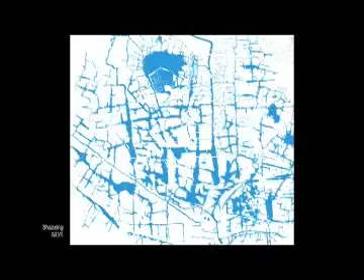When Dayu came into taming the water, it seems to me — and I'm really from North Louisiana, kind of country in some perspectives — they just dug a lot. If you take enough shovels and enough Chinese people digging, you can find a way that the water doesn't go onto the land anymore, because you've created a lot of space for it.

If you think about the plan of New Orleans, you'd see very little water. Look at the map of Jefferson Parish or New Orleans East and New Orleans in the middle, you'll see there's less surface water in New Orleans, excluding the river, than in Jefferson Parish or New Orleans East, which is an anomaly. It means the water has nowhere to go except in our streets where we store it, or in our cars or houses. So Shaoxing, a more recent but couple thousand-year-old water city in China, but European models moving closer to Holland.

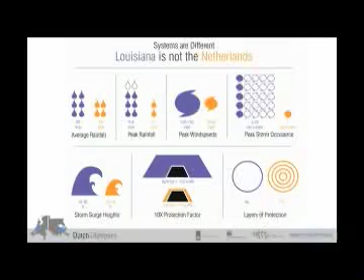If you look at that storm surge, if you look at the levee, what it takes to get us to a times 10, if you look at the peak rainfall, the peak rainfall we have is far higher than their peak rainfall. The 60 inches, 40 inches is not a big issue. The big issue is that deluge.

So we also have other problems, and this eroding coastline is the first problem. So Dutch Dialogues was not set up to solve the coastal problem. The coastal problem is essential. We can't live with this situation.

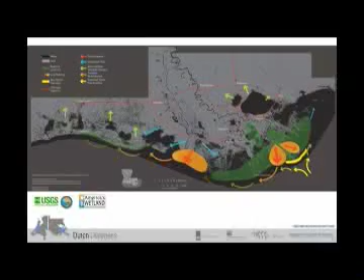We can't have that future. We have ideas about how to alter that. They're good coastal scientists, and that part of the discussion is integral. These are not separable layers.

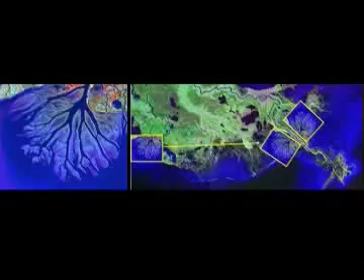And there is hope if we can control the river. But as I realized right after the storm, our issue in South Louisiana is a continental level problem. The drainage basin encompasses the whole continent, and we in Louisiana can't fix the whole thing. We have to advocate, and we have to become much more passionate and persuasive about our need.

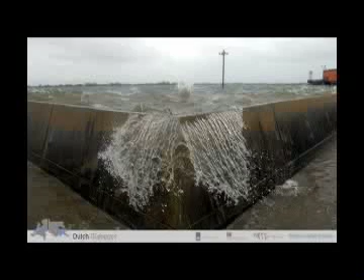The second level of protection is the levee protection system. Dutch Dialogues was not intended to address the levee situation. This Gustav image is a frightening image. It's not a comfortable image.

That's the industrial canal. This is outside the industrial canal, the MRGO closure that's being built. Whether ecologically it's the right approach or not, I don't know—nobody from the Corps is here. It does provide significant storm protection. So that in fact is the closure structure at the MRGO.

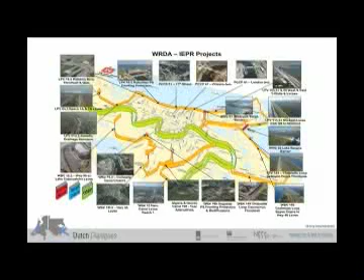Within that situation, within those barriers, those lines of defense, coastal, then levee protection, we started looking at internal stormwater management, figuring that the one thing the city of New Orleans and all its planning processes could really do something about was urban planning, urban design, and water.

This is an image taken by Rami in my office, right at his house recently. It's not just hurricanes that cause us problems. This is not the way the first world is supposed to live, but we live like this because we pipe and pump.

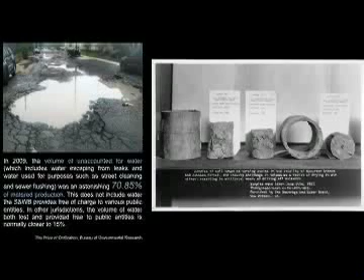I want to point out with this slide that this is an older problem and a bigger problem. If you look on the left, that was the report just issued by the Bureau of Governmental Research about the Sewerage and Water Board. You see that 70% number? That's the amount of treated water that is not being charged, meaning we're losing it.

But what worries you there is the lack of feedback. If you're an intelligent person, you have to learn that if I drink four whiskeys at night, I'm going to feel bad the next day.

If I pump all the water out of my soil, and that on the right shows you that in 1927 they understood the soils were shrinking when pumped dry. If they knew that in 1927, and in the 1930s they knew the ambient temperature of New Orleans went up when they pumped it dry, why don't we adapt? Why do we continue a regime that doesn't work? Well, mosquitoes. Anyway, there are other ways.

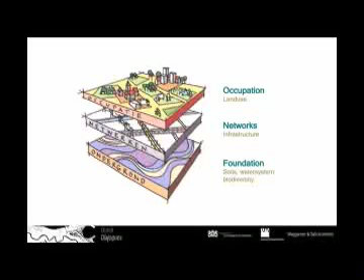This is the Dutch process of thinking. It's fundamental, basically the book in Europe now: you start planning from the foundational level, from the underground—soils, water system—and that other important word, biodiversity, because that also addresses mosquitoes. Then you get into the networks and infrastructure, and then to where we live, the occupation level.

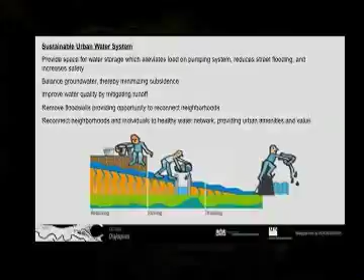So a sustainable water system looks different from ours, because it stores a lot of water where it falls, and only drains it when needed. What we want to do is keep it where it falls—that also saves energy, which is part of the big complex, isn't it?

So Dutch Dialogues 1 and 2, quickly: in Dutch Dialogues 1 we really only had an exchange of information. This was a comparative map done, I think, by DHV, and Piet Dircke from Arcadis showed it. This shows that in fact the deltas are similar in size between the Netherlands and ours.

Then there was a comparison of rules and regulations, and we operate in different conditions. They do not have flood insurance in the Netherlands—that's a higher degree of confidence than we have. They've got 10,000-year protection; we've got maybe 100. It's not a very good investment model.

So then in Dutch Dialogue 2, we looked at three scales. Transitioning to Derek, who participated in both Dutch Dialogue 2 and 3, we look now at safety first. We looked at the multiple lines of defense. We're looking at urban, right, number five.

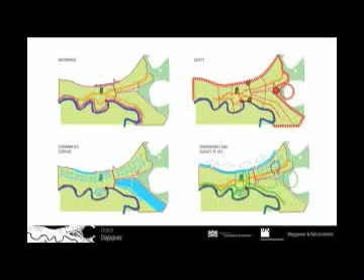But you've got to consider what happens on the outside to protect the inside. And then you have these backbones: safety levels, stormwater, storage—that's interesting, store water. But it's all for quality of life, because you're not building it to have a beautiful machine, you're building it so people can live in it.

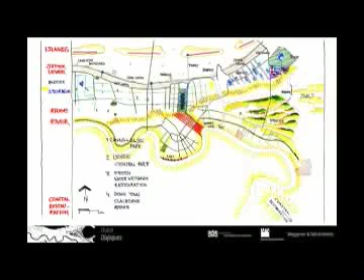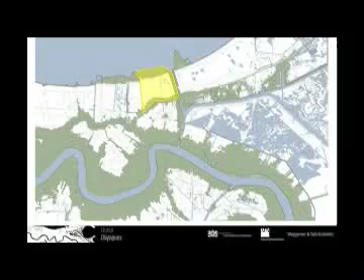If you look at this left-handed drawing, you can see the line that goes through this Gentilly Ridge. You can see the idea of islands, which is supplemental protection of the lake, maybe, maybe not. Claiborne Avenue was identified by us, yes, but also permeated by the Dutch, as a key component for reconstructing New Orleans. I don't have to talk about that in this room, but follow—it's an interesting discourse that will go on.

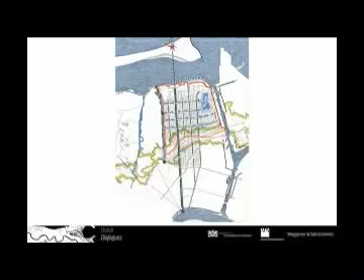We looked at a plan for Gentilly that would introduce water. You see the island lurking out there because the Dutch love islands—they go on vacation somewhere every year, many islands. Elysian Fields: when you're doing water-based planning, you're also looking for long lines and connections, and with UNO there, it's a very important street.

This rendering seemed to get a lot of attention, even though we were saying, no, no, we want to look inside the levees. But everybody wants to talk about the island outside the levees.

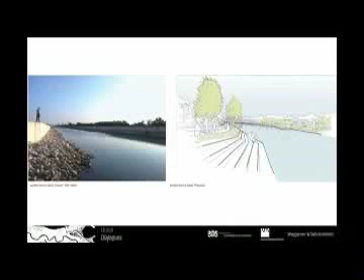This was a drawing, and it'll come back in the second part right after I finish here and turn this to Derek, about the outfall canals, which are a shameful waste of opportunity. You see what we have and what we might have. At that point, we thought.

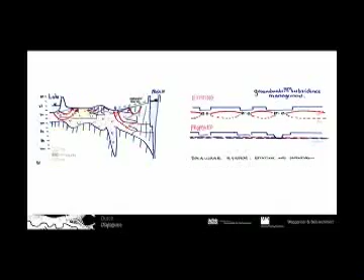And lastly, we looked at the smaller scale, which was the Hoffman Triangle area, a low-lying part of the city. And if you look at that cross-section, north-south, with the lake on the left and the river on the right, the river is very deep. It's a trick question to visitors—some of you may not know it's 60 meters deep or more at the French Quarter, which has incredible groundwater pressure.

And then you get this drawing on the right made by this groundwater expert about balancing groundwater, which is another key if you want your infrastructure investments to last. Groundwater balance is fundamental. Soils are fundamental. If we don't deal with these things, we're basically building our house upon worse than sand.

So we take these areas of urban blight. This is Felicity Street. And we say, well, what could you do? And maybe you could create a water system. This actually started at the river, but there's just this drawing at the end.

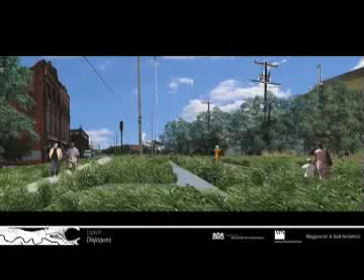And then you could have this area that had water somewhere out there instead, and probably has higher real estate value, with or without the electrical poles. And then when it rains hard, you have a place the water goes so it doesn't just stand in the street, and you can actually run.

So if you go back to Dayu, you're trying to get space for water and you're trying to get it below your feet. It's not that complex. But now I'll turn it to my good friend Derek and let him talk about Gutter to Gulf, and I'd like him to explain that title, if he will, since he's an architect too.

Thanks, David. Let me see if I can pull this one up.

So, hi, Gutter to Gulf. It's kind of hard to follow David because his presentation seemed to get stronger and stronger, and the message stronger and stronger as we go.

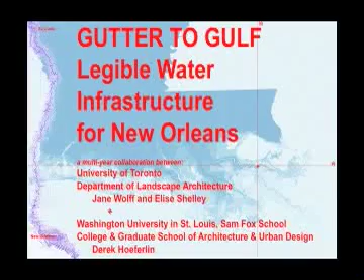A couple of years ago, a colleague of mine, Jane Wolff, who taught with me at Washington University in St. Louis and now is director of the Landscape Architecture Department at University of Toronto—we had been working down here in different ways with community groups, through the Unified New Orleans Plan, or with David, for a number of years, and we thought, how could we start to help parallel, and have students and academia enter into this conversation?

And I know it's probably kind of difficult for me in this kind of venue to come to the table with student work in terms of how it gets perceived or received. But I think the importance is to see how it becomes a message and an advocacy effort, and less of pie-in-the-sky ideas.

So to back up a little bit, I've taught at WashU, I used to live in New Orleans, and I've taught 5 studios now, the last 2 being Gutter to Gulf. First, the idea of Gutter to Gulf is about working at different scales, from the gutter of the house to the Gulf of Mexico.

But the previous 3 studios, I was working with many different community groups within the city at different scales. So the title here, 'the extraordinary, the everyday, and Gutter to Gulf's pursuit of exposure,' really gets to the root of what we're after.

So many of these issues we talk about—water management, what does it mean—it's so hard to uncover because it's rarely seen. But our work is not necessarily about the extraordinary, the hurricane, the worst-case scenario, as David was talking about, which deals with the much more regional and perimeter issues. Again, it's the everyday.

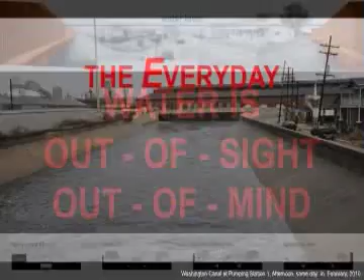And then later in the afternoon, this was it filled up after heavy rain. So again, we get this—most people in the audience understand that water is out of sight and out of mind. Everything's been buried below the street, and the water levels in much of the city are above the eave lines, the gutters of the house.

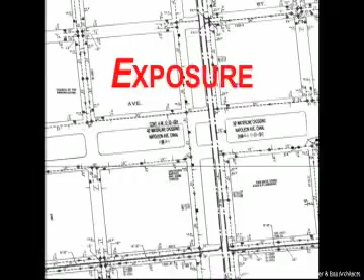So again, to this idea of exposure, what we've had students try to uncover is how do you work with accurate base information. This isn't just pie-in-the-sky efforts where we're speculating on what this street does, what this neighborhood does in terms of water. We're trying to work with accurate information as best we can.

So these are some of the Sewerage and Water Board maps, courtesy of working with Waggonner and Ball and other sources. And we have a website, guttertogulf.com, that shows last year's work, the first year's worth of work.

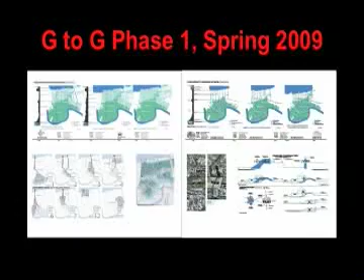The work itself is heavily based in research. So it's not a traditional architecture studio. It's architecture and urban design, but it's also questioning what architecture's role, or architecture students' role, is in dealing with issues of water management, and how design plays a part of that as opposed to just engineering.

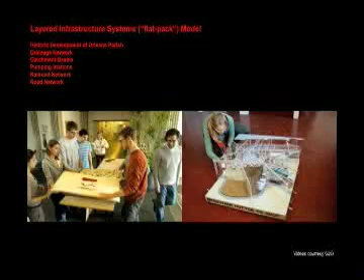So in the first phase, we were working as best we could with the base information. A lot of it was inaccurate, a lot of it was hard to find. It was a struggle for the students, but it's always good for students to struggle. We started to build a series of models and do a series of drawings with the information, trying to expose the infrastructure systems of the city.

So this is a kind of crazy model we built and brought down to leave with David and the Dutch Dialogues effort—a model of New Orleans. It's not your typical model that just shows the streets and houses, but actually shows all the layers of major infrastructure: the major highways, the pumping stations, the underground drainage, the rail lines, the street network, and how those systems start to work together.

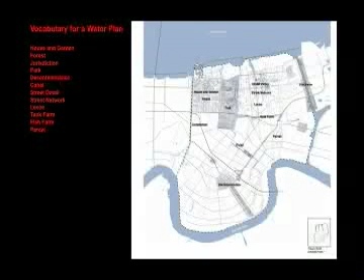Throughout the semester—a 16-week semester, spring of '09—the students came back after our field trip to New Orleans and came up with a vocabulary for a water plan. This is not a traditional master plan in any sense. It's just different words that deal with water and how they can operate across the city at different scales.

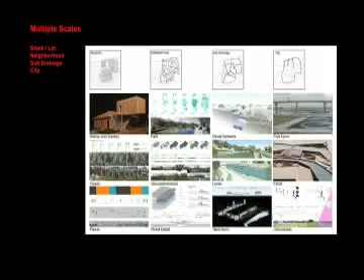So instead of just looking at the scale of the block or the lot, traditional architecture, students were also looking at what it means for water to operate at the scale of the neighborhood, the scale of the sub-drainage unit—which would be more or less the scale of the planning districts of New Orleans—and of course the scale of the city, larger scale interventions within the city.

So that was the first year. The second year, this past spring, we were able, again with David's help and others, to start working with more accurate base information. We started off the semester with something that's ongoing as a question, and I think for people in the audience to think about as well.

We had a threefold charge, and the first one was for the students to simply analyze the planning district and jurisdictional boundaries of the city and how they relate to the drainage units of the city, Drainage Basin 1 in particular.

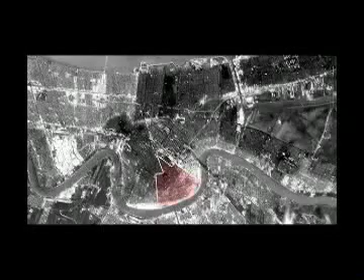So this is a typical map of the flooding after Hurricane Katrina, just highlighting one of the planning districts, Planning District 2, that I worked a lot in back in the Unified New Orleans Plan days. I was the district manager for this district.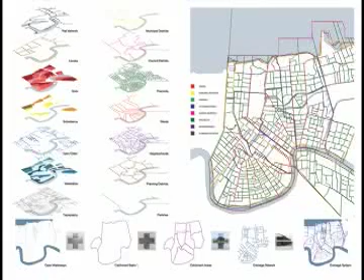And what we started to do was then see how the physical structure of the city—on the left-hand side, the rail network, the levees, the soils, the open water, what you can see—overlaps with the policy aspects of the city, the invisible boundaries. And they don't, pretty much.

On the right, you can see these purplish and green zones. That's where these different political boundaries misalign or align with the sub-drainage units, which are what the pumping stations are based on in the city.

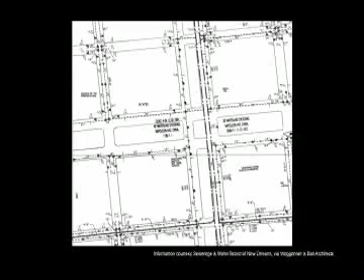The second aspect was to more accurately understand and expose the current hydrological systems. Back to this base map, this was a drawing one of my students had done about rethinking what you can do with the neutral grounds in the Gentilly neighborhood, Prentiss Avenue, I think—how you can start to expose it and make it a public amenity with bike paths, et cetera.

Then this past spring, my students with better information were able to correct it, to realize that what Andy, who now works for David, was drawing was interesting, but there were certain issues because we didn't know what the culvert sizes were, et cetera. This is a long-term, ongoing learning process we're going through.

The third main aspect was to generate classification systems of the drainage within the city. The students and faculty worked to develop taxonomies for the historic remnants, navigation routes of the city, open canals, and underground canal system.

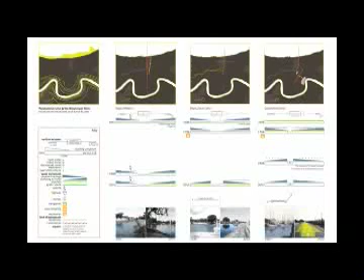For the historic remnants, we did a series of drawings to show the development of the city over time, and a coding of how the different canals and drainage pathways were altered and got out of whack with the issues of subsidence and development throughout the 20th century, along with real simple cross-sections showing what they used to look like and what they look like now.

The navigation routes start to take a step back and understand Drainage Basin 1 in Orleans Parish within the larger structure of the region, and then construct informational drawings that show how aspects like the riverfront along the Mississippi have developed over time and become harder edges.

Open canals are simple drawings that show the different types of canals you can see, such as Washington Canal or London Avenue Canal, and how they relate to the larger drainage network of the city. These are again trying, with the best we can, to use base information and numbers to back it up.

Finally, the underground canals, where we're showing how the water moves throughout the city in these different sub-drainage units in Drainage Basin 1, and the capacities that operate with them, along with a series of drawings that show all the different culverts—single box, double box, etc.

These drawings start to talk about how water moves through neighborhoods and how it gets to these pipes and then eventually out to the lake.

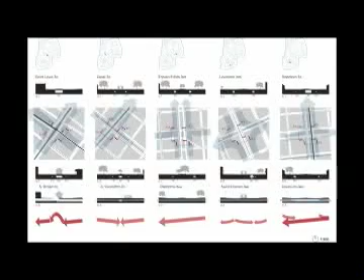In the bottom left, you can see these red lines that show on a dry day where the water goes, and out from, let's say, the Mississippi River's edge along the Garden District, the journey of the water will eventually make it out to Bayou Bienvenue. As opposed to during wet times, it switches its route and goes out to Lake Pontchartrain.

So we're really trying to uncover what this underlying system is and then how you engage with it and supplement it.

So kind of four parts to our work: research, speculate, disseminate, and collaborate to make it within our sites, within our minds. What does it mean for the future of New Orleans?

It's not necessarily these really wacky ideas of how we can live with water in the city, but trying to seek out more publicly visible ways to showcase the student work.

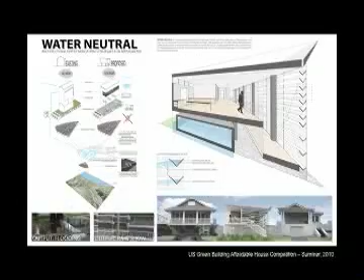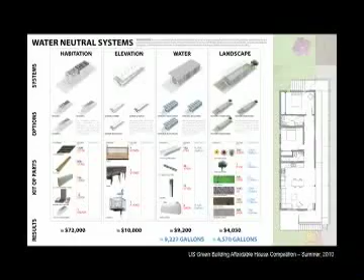This was a competition that a couple of students entered in the Broadmoor neighborhood about speculating on affordable housing, taking on the house prototype and using water as the main design component of the house, so you could create a water-neutral house and site that wouldn't burden the existing drainage system within the neighborhood. It didn't win the competition, unfortunately, but it was a strong project.

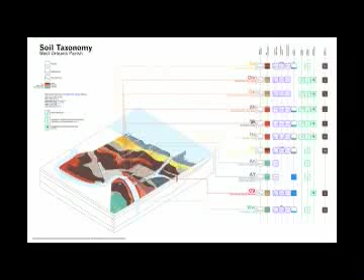This is another project at a bigger scale where a student was doing a soil taxonomy, specifically looking at the Elysian Fields corridor.

David alluded to earlier in the Dutch Dialogues, the Gentilly project that was looking at Elysian Fields connecting the river to the lake, and the soils that exist throughout that transect, or throughout that main boulevard, change along the way.

So it basically tells you that if you start to look at what type of tree plantings, tree types, soils, and grasses you use within that corridor to help mitigate the storm water, it changes.

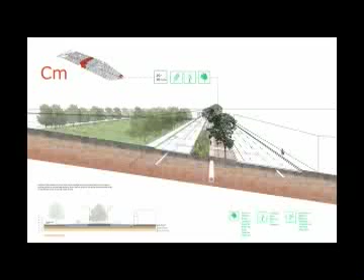So instead of Elysian Fields being perceived—albeit gorgeous as it is with its live oak canopy and green all the way through—he was starting to question how people can inhabit that space in a varied manner, and then help, from neighborhood to neighborhood, mitigate the water storage system or the water system.

And then finally, I'll end on an ongoing project that isn't public yet—it's called NOLA is Water, part of Gutter to Gulf. The website will say it's in production while we're making sure everything's tight.

It's going to be an educational, informational site for anyone to use. We've put together a whole series of words that deal with water within the city. You can click on these words—for instance, wetland—and get bold statements that everyone in the audience probably knows by now, and maybe more Americans know since our president said it.

Then you go into it, and it's highly interactive. I'll show the beta test now—you can move your mouse throughout these areas of the city and see how the different drainage units work.

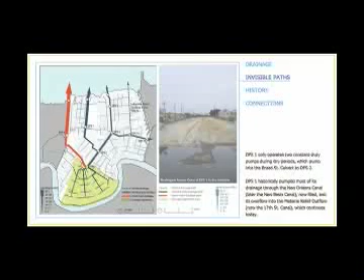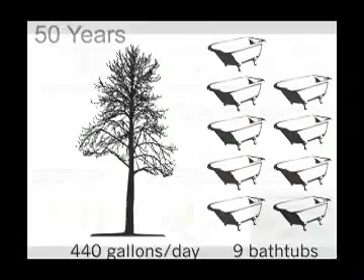There are also infographics, like showing that a mature cypress tree can uptake 440 gallons of water a day, which is 9 bathtubs. That's pretty impressive. But we, I guess, continue to plant palm trees.

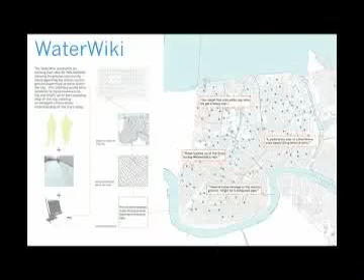NOLA is Water—we're going to continue it further to raise more awareness, or maybe turn it into a wiki-based website. These aren't developed yet, but we'd like to move forward with it, where someone could go in and report, say, a pothole forming right in front of their eyes. There are big challenges with how you control and disseminate this information, but I think the legibility is important.

And then finally, I'm starting to take Gutter to Gulf and try, just like with David's work and the Dutch Dialogues work, to go global. We can really start asking questions—it's important to compare deltas, urbanisms, and watersheds around the world, but we have to be careful why we're comparing them, since issues of politics and socioeconomics are involved. So we're going to have the students and myself look at a bigger scale.

I was always troubled by the fact that, as a kid, you got a globe, and New Orleans is at 30, and you go around, and Cairo's at 30, and our river flows this way, and theirs flows this way. I didn't realize that opposite us in the northern hemisphere is Tibet. So why are we so low and they're so high—couldn't we split the middle somewhere? I don't know.

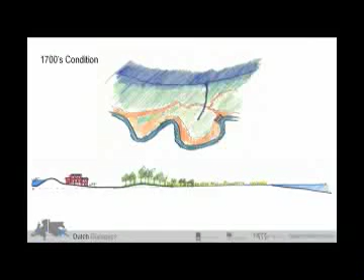If you trace our condition back, a key point is that New Orleans was at or above sea level in 1700 when it was settled. That's the green area. But if you look at the section below, the lake is on the right, and out to that silver line was the horizon—a back swamp, but basically land at sea level or just above. As time went on, we got to this condition where some parts of the city are 8 feet or more below sea level, because we drained it, tried to dry it out so we could live there.

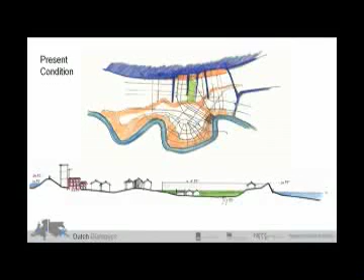And you see that line going across the bottom, from the top of the levee—the flood wall that those girls were trying to look over. How'd they get up there? I don't know that.

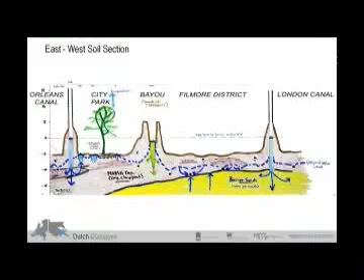This is an east-west section. The same hand that drew the north-south section drew this one. What you see is an exaggerated perspective again, and you see how absurd that really is with those stem walls, those highway walls on top of those outfall canals, with the bayou in the middle, and that dotted line is sea level. So you see this besides, and you're remembering the soils.

The existing outfall canal system is, in a way, the current Battle of New Orleans. I don't know the right victory to search for, but this asks that question. That's the Orleans Avenue Canal on the left, London on the right, and the pumping station back inside. That was the fairgrounds, the racetrack, where we have the jazz festival in the middle.

So if you actually get to look inside there, this is what you see. Maybe they don't want to have to maintain it, so they keep the walls out so they don't have to cut the grass, so to speak. But you can't maintain that. The point is that if you go there and you scour that, you undermine the wall. So we have, ultimately, a failing situation. There are 15 and a half miles of those walls in the city of New Orleans.

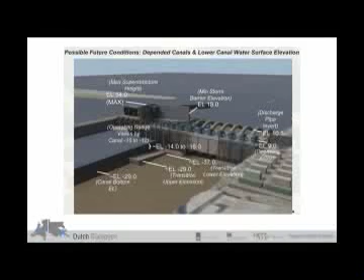Option one, this lingo, those of us who live in New Orleans—and I apologize for the New Orleans-centric perspective, it's not my sole capability—but in that thing, option one, the Corps of Engineers, is to leave those walls there and basically close it off, and you're going to have to reinforce those walls, and live with them ad infinitum.

So option two, or another thing, becomes possible once you put these permanent closure structures at the outside. The permanent closure structures are in process of a design build. Very complicated drawing—I've looked at it many times and it confuses me still.

But you see the pump station needs to be 54 feet above sea level. You've got to get the water out at about 10 and a half feet below sea level. But the number that's troublesome is either minus 17 or minus 29. That water is going to be 29 feet below sea level there. The ground's 8 feet below sea level. There's no real benefit even if you take the walls down, because now you've got to put a wall up to keep it from falling in because it's so deep.

So that's what option two would look like. You could actually take the walls down and the water level's way down, but then you've got the freeboard so that you can get rid of the canals and it'll drain by gravity.

So this is what officially we in New Orleans want. The Sewerage and Water Board wants it, the City of New Orleans wants it, Jefferson Parish wants it, the State of Louisiana probably wants it. But we asked—because nobody pays us to do this stuff, right? So we can say what we want. We asked, is there another way?

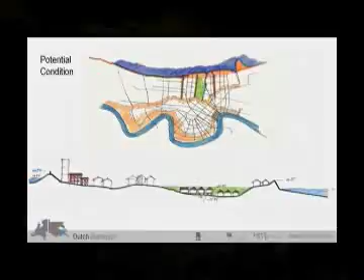So the idea that was put forward in Dutch Dialogue 3 was, and this is the large-scale issue, Karen, the bigger scale thinking that sometimes you want to engage in: okay, you take down those walls and you get this area here where you can work with the top of the levee at about +5. And you deepen it some, but you keep pumps in place so you create an operating system.

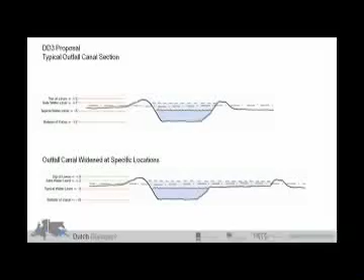And you also look for opportunities to widen the canal to increase the storage capacity, because it's all about storage capacity. Water doesn't dissipate, unless it's Noah's time, 40 days and 40 nights. You can get rid of it, but you have a place to hold it.

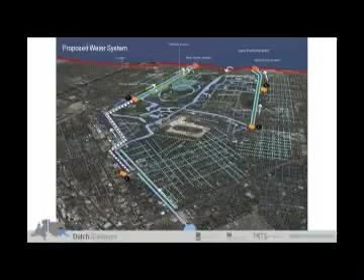So what we proposed in this, and this is quick, three days' work, was to create a circulating water system that in fact uses Bayou St. John as the source of water into the city. If the lake's at +1, the bayou's about minus half a foot, minus 0.6—I won't get too technical—but you'd set the water level in these canals at -5, and what you've got then is a system where water moves all the time. And now we don't worry about mosquitoes, it's slightly brackish.

So anyway, without going into more detail, that is the big idea of Dutch Dialogue 3. It's also, because I'm a moderate, I suppose, an intermediate cost component to option 1 or option 2. But it is where all the benefits are. Why make investment if there's no benefit in it?

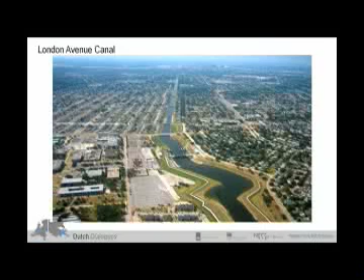So what we get is the London Avenue Canal becoming a green sward with water in it. So instead of this, which we have now, you get this. And you get this opportunity to create this space alongside. I would dare say that the real estate value would grow higher, and that abandoned little brown house would become something else over time, because now I'm living next to water.

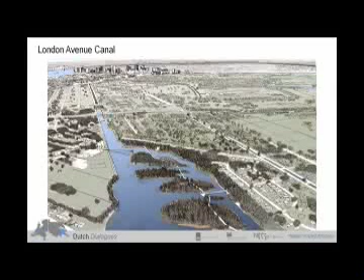So you get the London Avenue Canal then, and this is behind Dillard, where there's abandoned space, and you need the water storage capacity, so you use it for that, and you create a park with water.

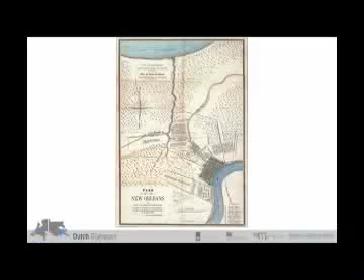Bayou St. John and the Lafitte Corridor were the second thing we looked at, and Bayou St. John's the reason the city's there. It's Louisiana—I shouldn't explain that too much—but the bayou was truncated. The Lafitte Corridor was the Carondelet Canal, originally a waterway that connected to the French Quarter. By 1800, there was a waterway there.

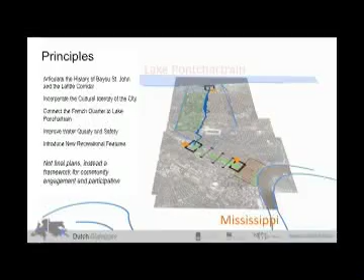There are different identities through there. Those stars are big moves possible. We do want to think small and big at all scales. This is pretty much where you have to go show somebody what water could be like in New Orleans.

That's fundamentally what we have. You can visit the lake, you can visit the river, but this is where people live. It's a desirable component of life, good real estate, a good place to live. However, it just ends—water stagnates, it truncates, and it's just cut off now.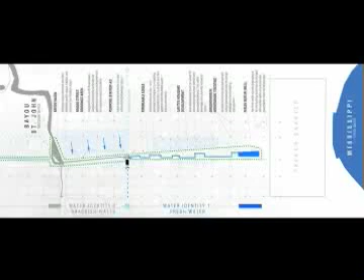So what this plan looks at is, if the bayou's coming from the top, you could let it continue, creating a bigger space for water at this turning point at Jefferson Davis, and then you get something looking back toward the city where this is no longer just a dead end of a bayou. It becomes quite a nice public space for festivals, whatever you want—a good place to celebrate this condition of water.

The Lafitte Corridor then is this extension that goes to the back of the French Quarter. It's a fallow right-of-way that, through Lake Douglas—who may or may not be here anymore—and others' advocacy, is going to be designed into something. The city owns it all. It's like this now, and like this now. This is what we call drainage, but it's really only a hazard more than a benefit.

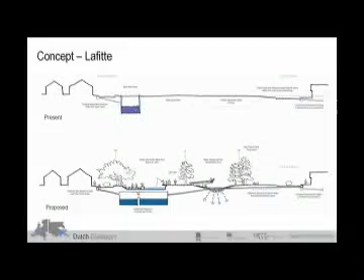And you look at other ways to put water in there. Maybe these sections are too technical, but the one on the bottom—the existing is on top—the one on the bottom is putting water above water, an interesting concept that the Dutch love, and so do I. But I've also found out, having photographed this in Tokyo, that the Japanese do it too. That's water above water—a little creek above water storage and drainage in the Arakawa Ward, which is quite a bit below sea level.

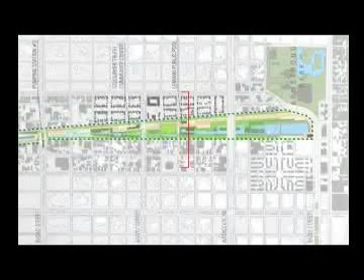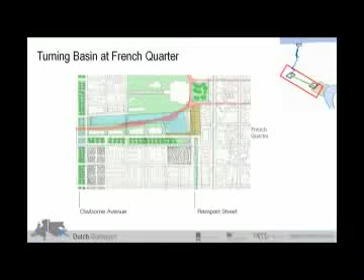That would be a brackish identity at the other end. At this end, it would be a fresh identity. That may or may not interest anybody—it does me. You'd get different kinds of biological life, different kinds of activities. So at the turning basin, you would have had this, but you won't get that back. You get something more like this, which is a source of water, a spring, groundwater.

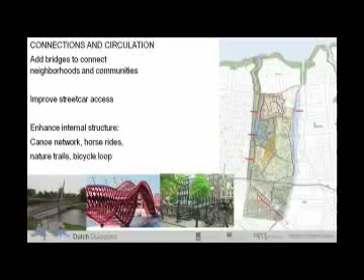City Park we looked at. City Park has a master plan, and we're respectful of that—Bob Becker gave us his time and sat with us. But the basic thing is that on the right, you see water added, so it's an enhanced water structure for the park, which does things for the neighborhood. And then the park would hold more water, probably have higher value, maybe get me there on a Sunday afternoon in that case. It's already building on the park's identity. That is City Park, another place you can see water in New Orleans.

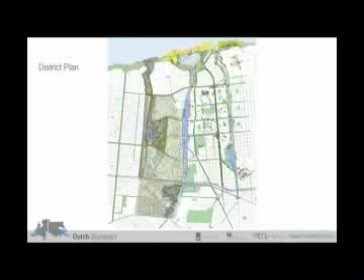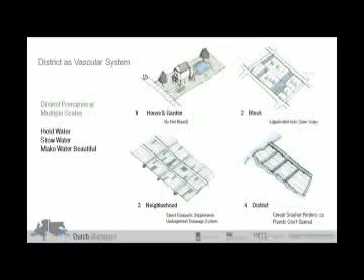So then we brought it back to a district plan, and at the district plan, there are all these different identities for water. That's City Park on the left, in the big area. The idea is this is not engineering, it's more a vascular system—not just a drainage system. But there are these different identities from house to block to neighborhood to district-wide.

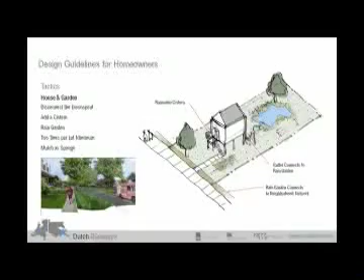So I think it's fair to say that there are private responsibilities as well as public. One of the things we advocate, Derek's 'gutter to gulf' idea, is that you take care of the water that falls on your site and slow it down instead of just pushing it into the street and then saying, why does my street flood?

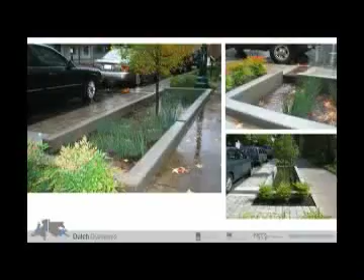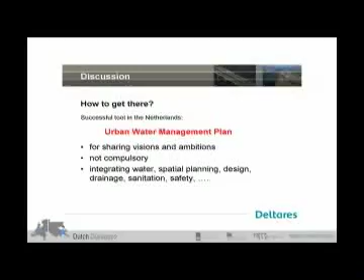How do you get there, in conclusion? This is a slide from Deltares. Deltares is the research institute that Senator Landrieu has her eyes on for us. We'd like that. Urban water management plan is what they say. Well, we think so too. We think that exercise, that consensus-based process, can move this forward.

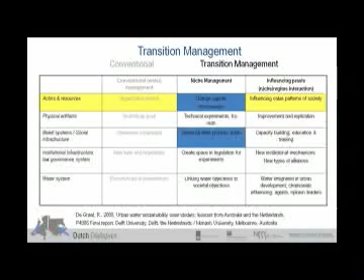Thank you very, very much. It's very informative and attainable. There have been great strides at having this discussion at the federal level, international level, and the local level. I also want to applaud David and the Louisiana Recovery Authority Office of Community Development for the $2 million that's going to Jefferson Parish, St. Bernard, and Orleans for a water management plan. I believe so, which gets us a real step further. Now I'll open it up for questions. Does anyone have anything? Yes.